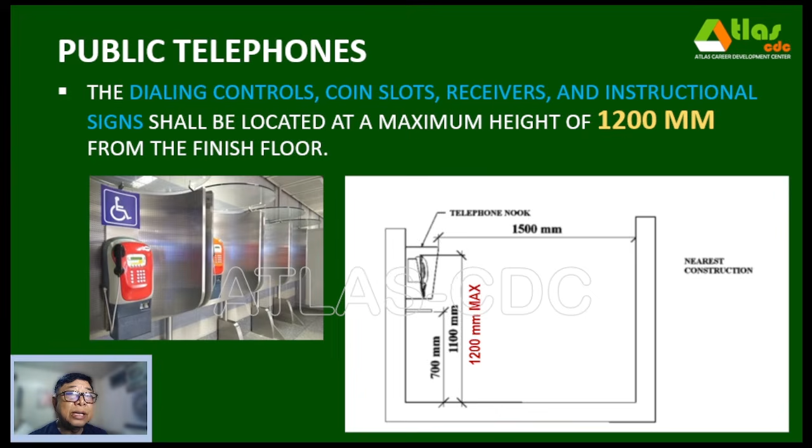Also, provide a clear, unobstructed space of 1.8 meters by 1.8 meters in front of all mounted and freestanding telephones. So, ang clear space mula doon sa telephone apparatus hanggang sa wall, no? Clear space should be 1.8 meters. At saka sa harapan, dapat ay merong ganong space na width, no? 1.8 meters in front of this telephone area.

Now, for establishments that provide public telephones, accessible public phones shall be installed, one for each floor and one for every group of 2 or more phones. So, sa mga required lang to, no, na magpo-provide ng public telephone. So, maglagay ng isa sa bawat floor, no? At kung marami, for every 2 or more phones, one, no? Accessible public telephone facility.

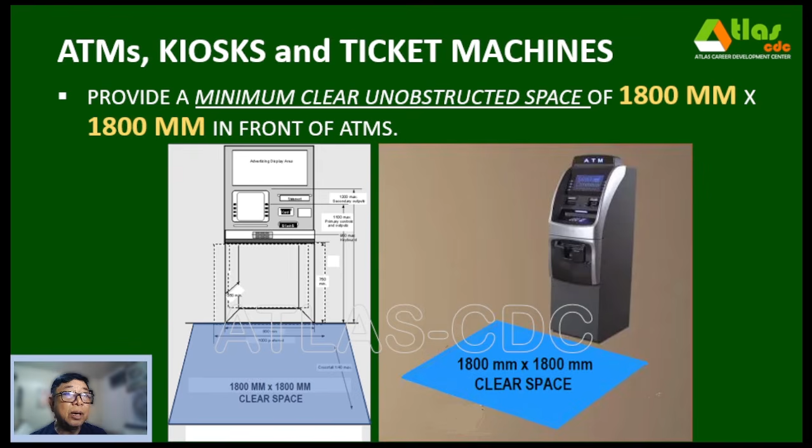And for ATMs, kiosks, and ticket machines, provide a minimum clear unobstructed space of 1.8 meters by 1.8 meters in front of the ATM area. And instructions and all information for use shall be made accessible and independently usable by persons with visual disabilities through braille and tactile surfaces and audio through speakers or earphone jacks.

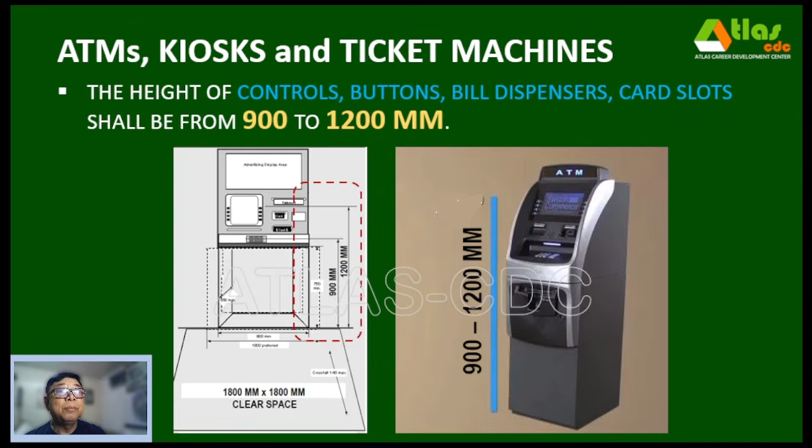The height of controls, buttons, bill dispensers, card slots shall be from 0.9, so this is a minimum, up to a maximum height of 1.2 meters. Now, counters shall be provided in the kiosk, ATMs, and ticket machines at a height of 750 mm. So, ito yon, no? Merong counter to allow wheelchair users to easily approach. To enable easy operation of the machine by wheelchair users, this space under the counter shall have a minimum depth of about 480 mm.

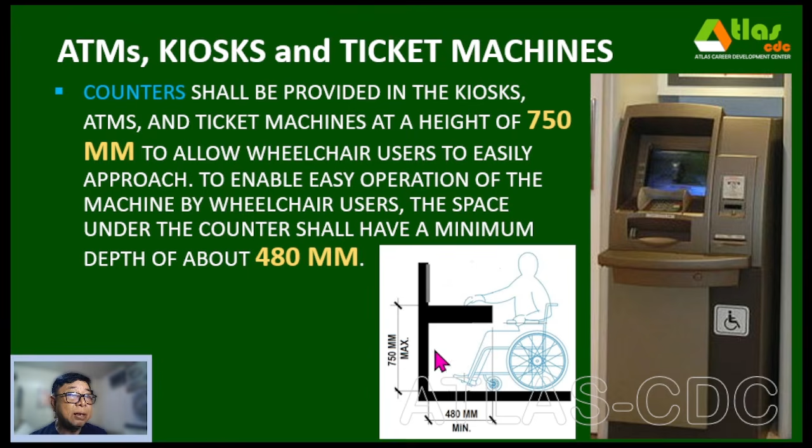Now, there shall be clear signage indicating the location and function of the kiosks, ATMs, and ticket machines, as well as any instructions for their use. The signage shall be easily visible and located at a height of no more than 2.4 meters above the floor.

We now have the requirement for accessible ticket office counters and information desks. So all counters shall apply universal design. 2 level counters, one is the low counter and the higher counter, shall be provided in all customer service and ticketing offices and information desks. It shall be accessible both in a standing and sitting position.

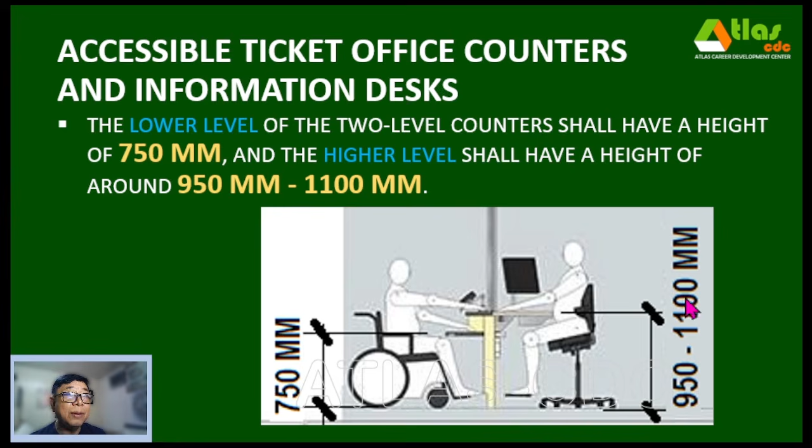The lower level of the two-level counter shall have a height of 0.75, this one, and the higher level shall have a height of around 0.95 or 950 mm up to 1.1 meters. The counters shall have a 700 mm minimum vertical legroom space. So sa ilalim ng counter is 0.7 clear space and shall have a counter depth of 480 mm.

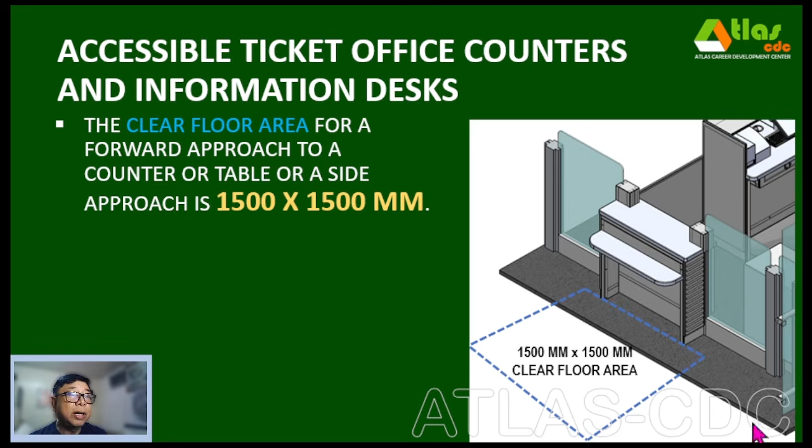The clear floor area for a forward approach to a counter or table or a side approach is 1.5 by 1.5 meters. So ito yung counter, merong clear floor area na 1.5 by 1.5 meters. Now, each counter shall be at least 900 mm wide, this one, to provide ample space for people using wheelchairs or mobility aids.

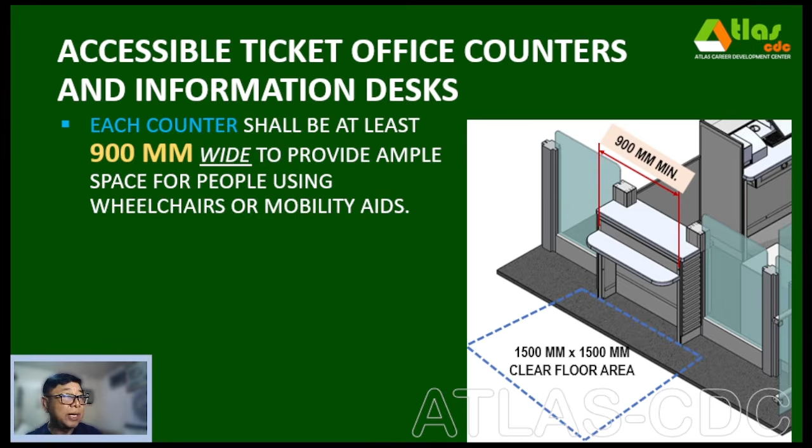We now go to workstations. Accessible workstations shall account for a minimum of 1% of the total number of workstations available in an office, workspace, or similar environments. And the access aisle shall have a minimum width of 900 mm. So yung mga dadaanan na space between workstations ay may minimum width na 900 mm.

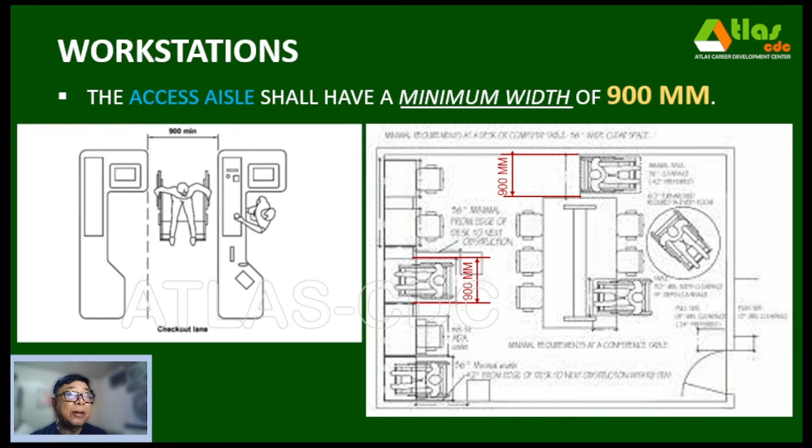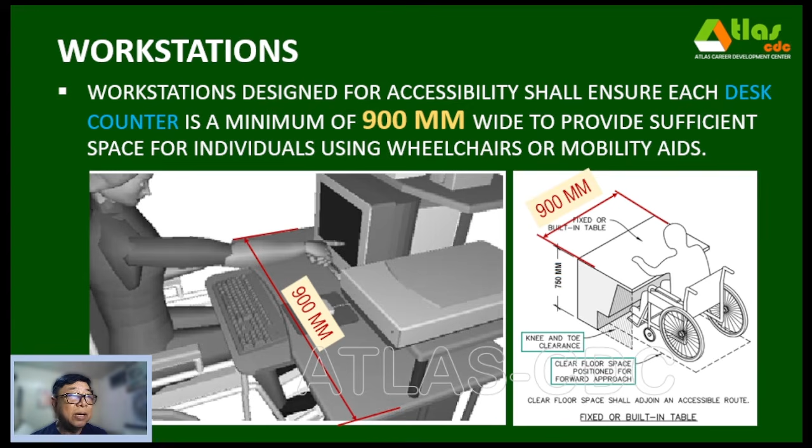The workstations designed for accessibility shall ensure each desk counter is 900 mm wide to provide sufficient space for individuals using wheelchairs or mobility aids. And this workstation shall include desk counters with a minimum vertical legroom space of 700 mm and a counter depth of 480 mm. This one.

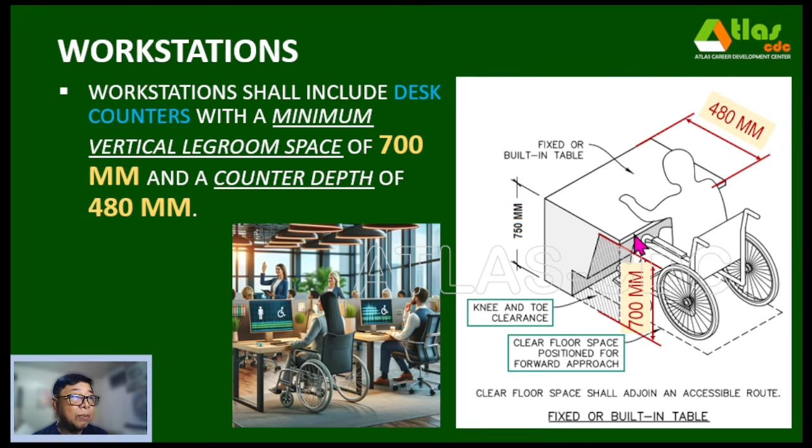For restaurants, eateries, and other dining establishments, a circulation path of at least 1.5 meters wide shall be provided in front of the stalls. Ito yung stalls. Ito yung other spaces, no? Either table or railing. 1.5 meters is the minimum clear distance. No?

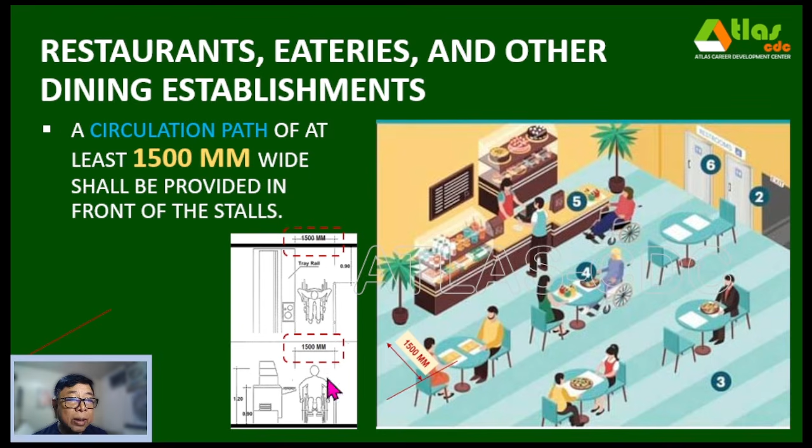An accessible route with a minimum clear width of 900 mm shall be provided from the circulation path to the tables intended for persons with disabilities. So ito yung pinaka-aisle width, no? 0.9. Lahat ng dadaanan, clear space mula doon sa mga dining chairs.

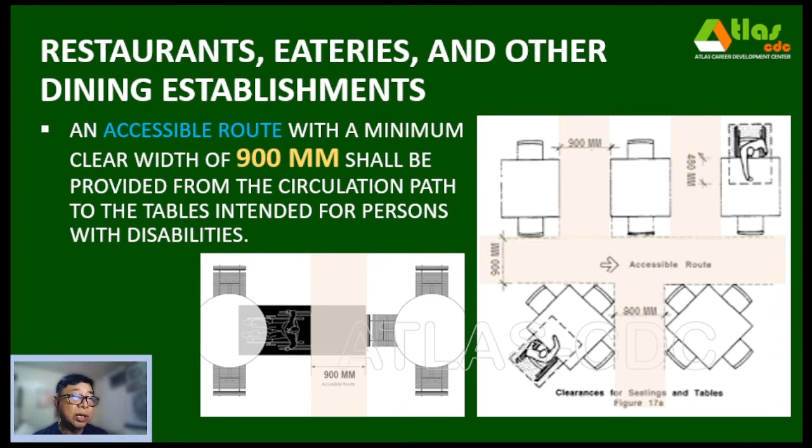Now, where fixed seating is provided in eating outlets and establishments, 10% of the total number of dining tables shall be accessible to persons with disabilities. Any fraction thereof is equivalent to 1 accessible dining table. So halimbawa, mayroong 22 restaurant tables times 10%, yung magiging 2.2 accessible dining tables. Pero this is to be rounded off to 3 dining tables.

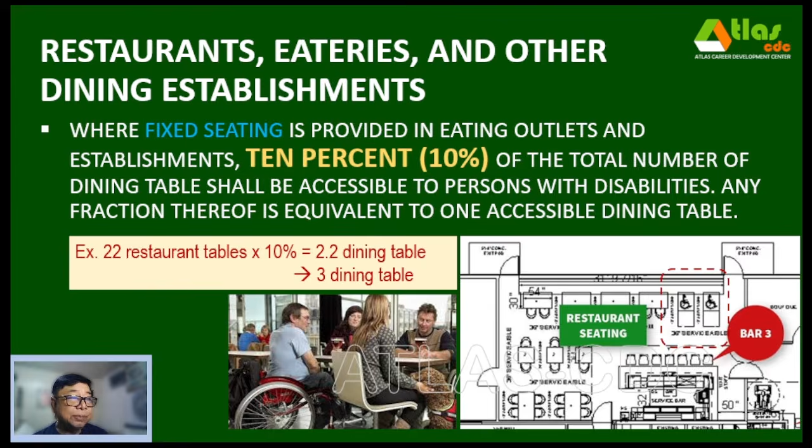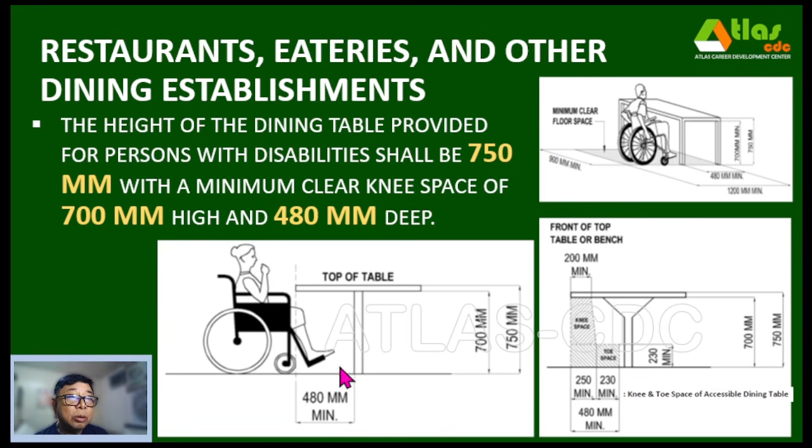Now, the height of the dining table provided for persons with disabilities shall be 750 mm. That is the maximum height. Again, with a minimum clear knee space of 700 mm and a depth of 480 mm. So, ito yung knee space na depth, no? 480 mm.

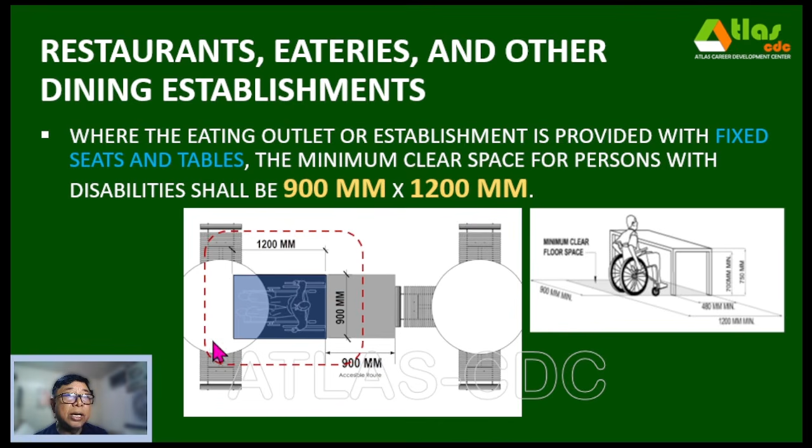So, where the eating outlet or establishment is provided with fixed seats and tables, so kung fixed seating yan, tsaka table, ang minimum clear space for persons with disabilities shall be 900 mm by 1.2 meters. So, ito yung space, no, for the persons with disabilities. Now, the sizes of fixed tables shall accommodate 2 wheelchair users. So, kung merong 0.9 by 1.2 na dalawa, then this should accommodate ng dalawang wheelchair users yung table.

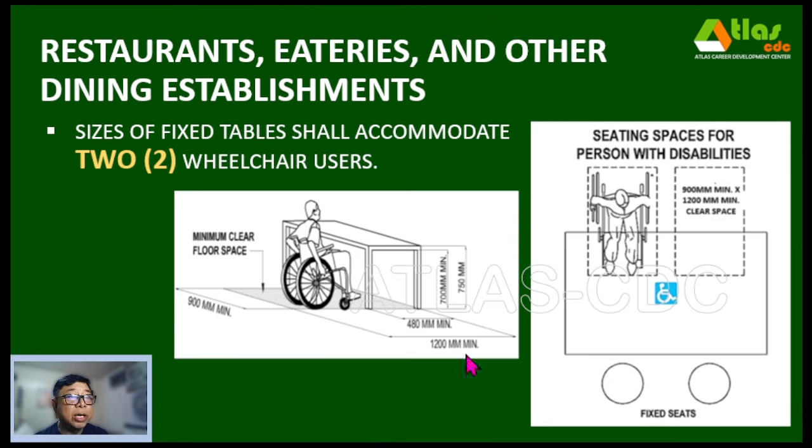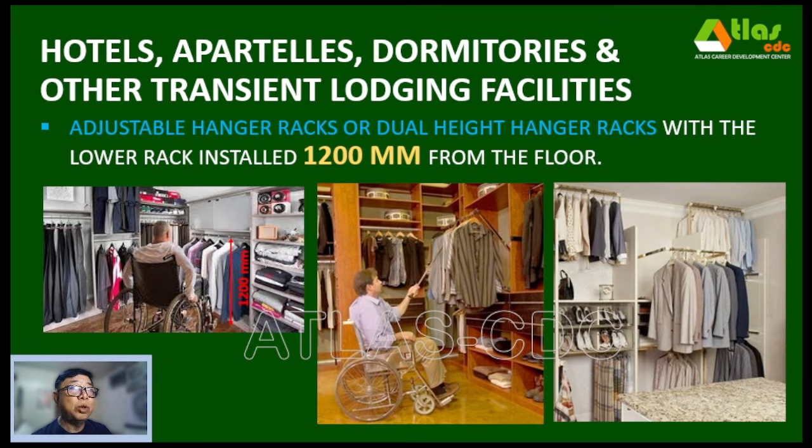Now, for hotels, apartelles, dormitories, and other transient lodging facilities, 2% of the total number of guest rooms shall be accessible guest rooms. The bed shall have a maximum height of 500 mm. Adjustable hanger racks or dual height hanger racks with the lower rack installed at 1.2 meters from the floor.

And this is a suggested layout of an accessible one-bed guest room, providing a hallway width of 1.2 meters minimum. And on one side of the bed is a 1.5 by 1.5 meters wheelchair space. And the other side of the bed will have a circulation space of 0.7 meters or 700 mm minimum width.

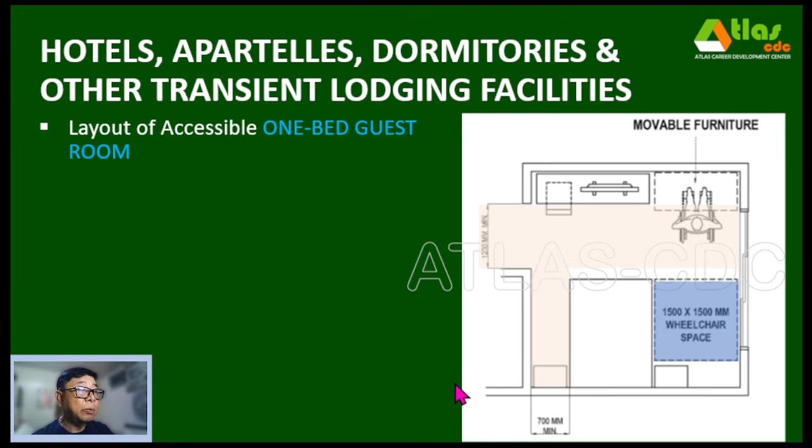Now, this is the suggested layout for an accessible 2-bed guest room, wherein the door opening is minimum of 0.9 width, and after the door opening is a clear space of 1.5 by 1.25 minimum. The circulation space minimum width is 1.2 meters. And if you have 2 beds, the clear space between the 2 beds is 0.7. And one side of the bed shall have the 1.5 by 1.5 meters clearance, wheelchair space.

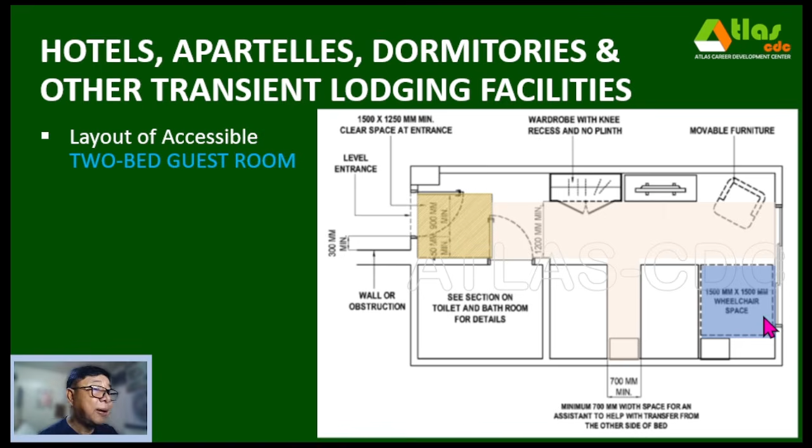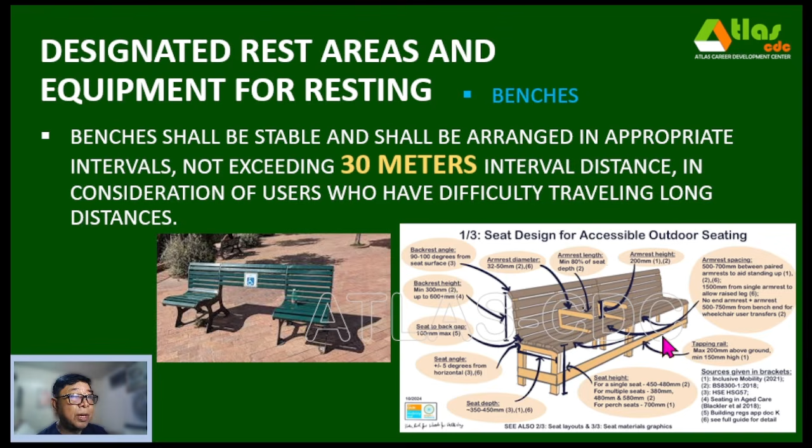This is the requirement for designated rest areas and equipment for resting. For benches, this shall be stable and shall be arranged in appropriate intervals, not exceeding 30 meters interval distance. So, halimbawa, merong mga walkway na lalagyan ng mga benches, pinaka-maximum distance is 30 meters na merong bench for PWDs. At pwedeng ang design ay maglagay ng space for the wheelchair or merong ganitong armrest provision para sa mga non-wheelchair users. Now, for outdoor rest areas, appropriate shading shall be provided to ensure comfort and protection from the elements. Kung nasaan merong bench, meron shade na ipoprovide.

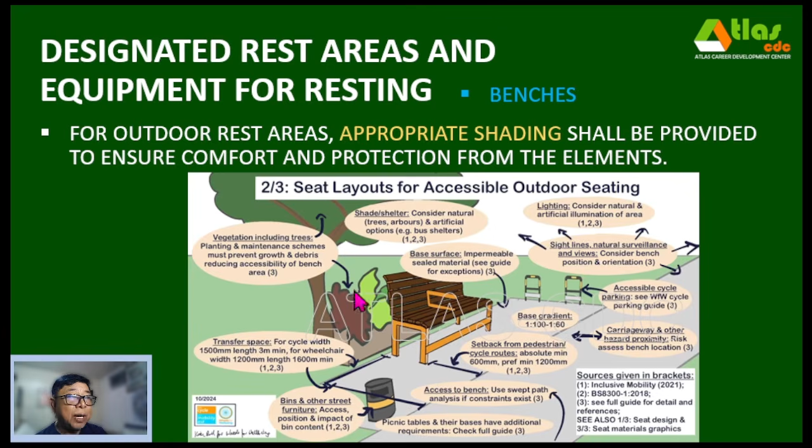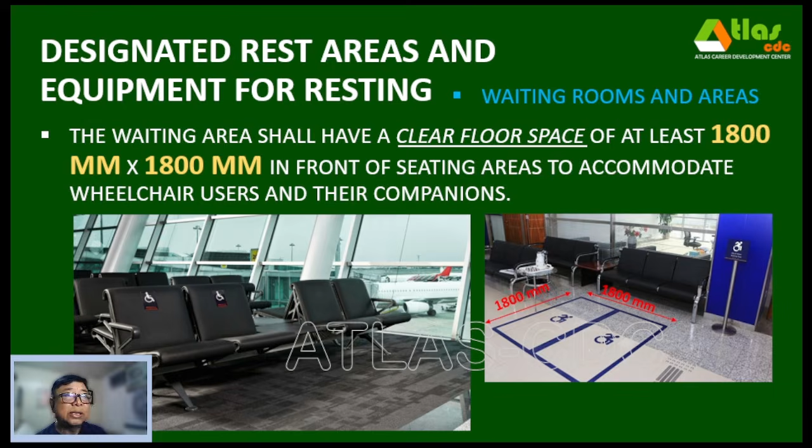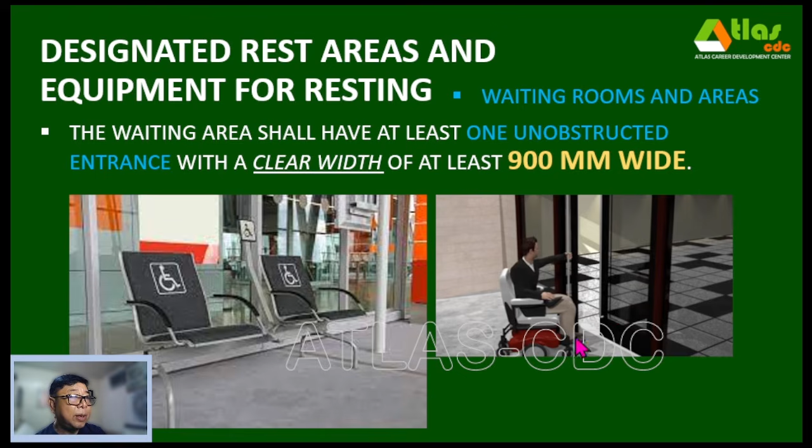And the waiting rooms and areas. The waiting area shall have a clear floor space of at least 1.8 by 1.8 meters in front of seating areas to accommodate wheelchair users and their companions. So, ito yung wheelchair area, 1.8 by 1.8 meters. The waiting area shall have at least one unobstructed entrance with a clear width of at least 900 mm. So, yung mga door, minimum clearance is 900 mm. And at least 5% of the seating shall be designated as priority seating for individuals with disabilities.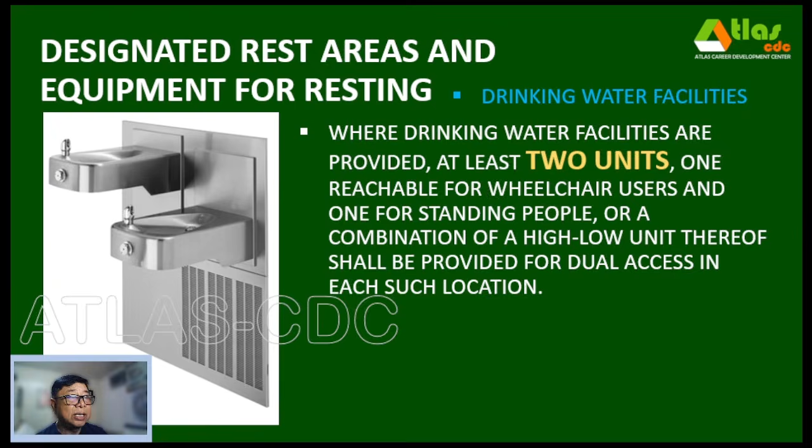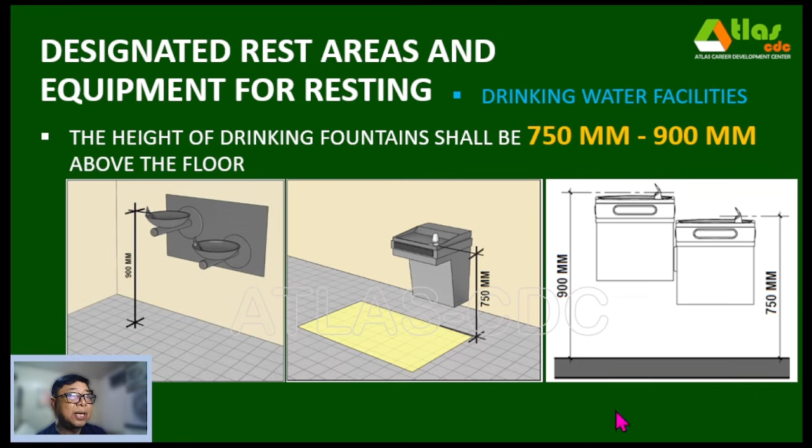Now, for drinking water facilities, where drinking water facilities are provided, at least 2 units, one reachable for wheelchair users, and one for standing people, or a combination high-low unit, for example, this one's a combination, shall be provided for dual access in each such location. The height of drinking fountain shall be 750 mm up to 900 mm above the floor. So, yung mas mababa, 0.75 or 750 mm, at yung mas mataas is 900 mm.

Now, the spout shall be able to extend at least 50 mm from the front edge of the fountain. So, ito ang spout. Now, if a bottle filling station is included, the spout shall extend at least 100 mm from the front edge of the fountain. So, ito yung magiging distance kapag may bottle filling station. Or you can provide a separate provision for bottle filling station.

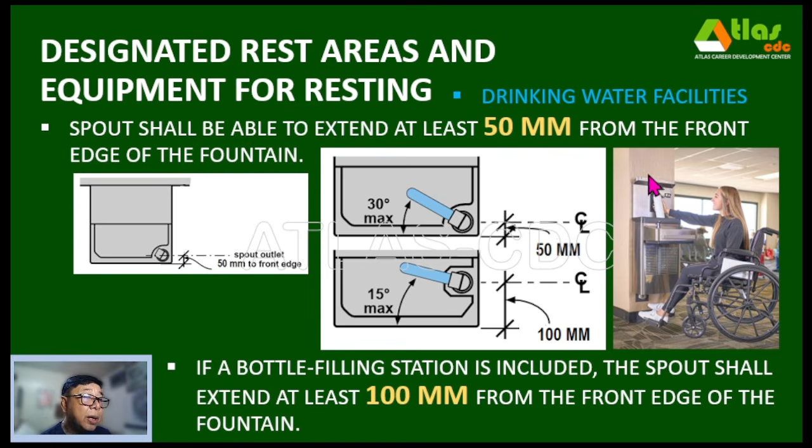Now, the drinking fountain shall have a clear floor space of at least 1.8 by 1.8 meters in front of and alongside the unit to allow for a person using a wheelchair to access the fountain. So, 1.8 by 1.8 clear space sa harapan ng drinking fountain.

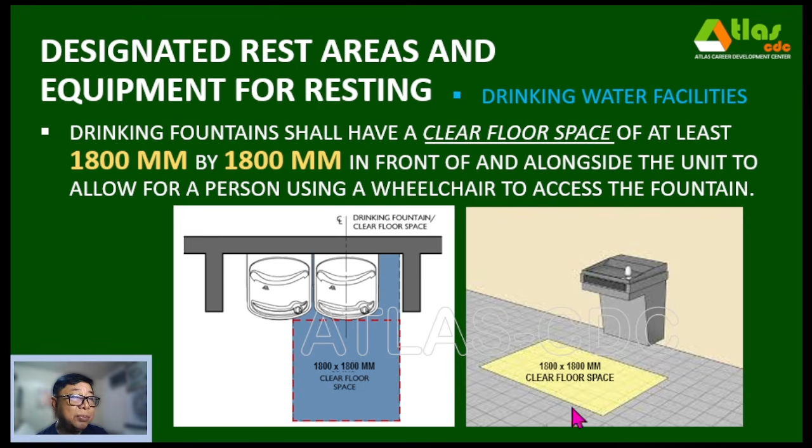The clear knee space of 750 mm wide, 200 mm deep, and 650 mm high shall be provided. So, ito yung knee space, no? At a height of 650 and a depth of 200 mm, ang width niya is 750 mm. Yung toe space naman niya is also 200 mm deep, 200 mm high, at ang width niya is also 750 mm.

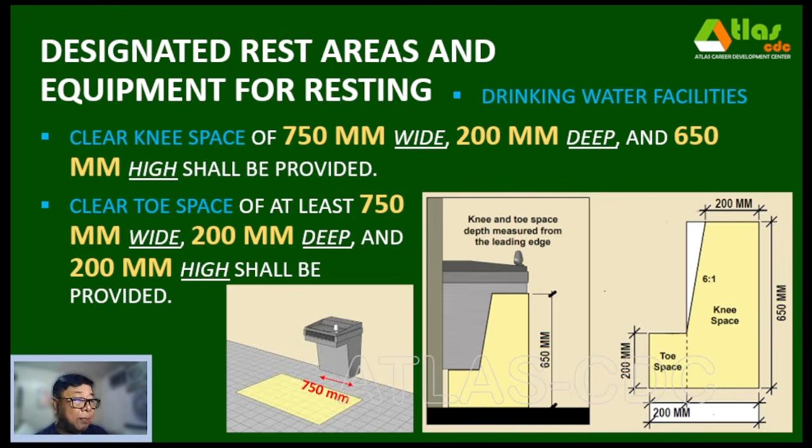Now, for breastfeeding room, there shall be a designated room for nursing and diaper changing purposes that is accessible to all.

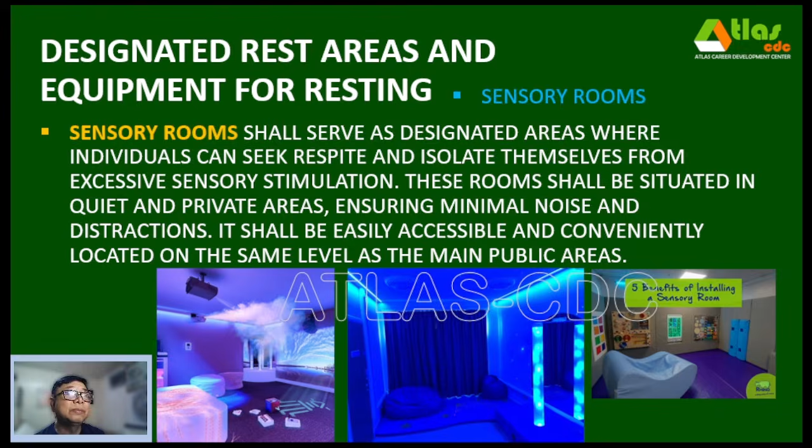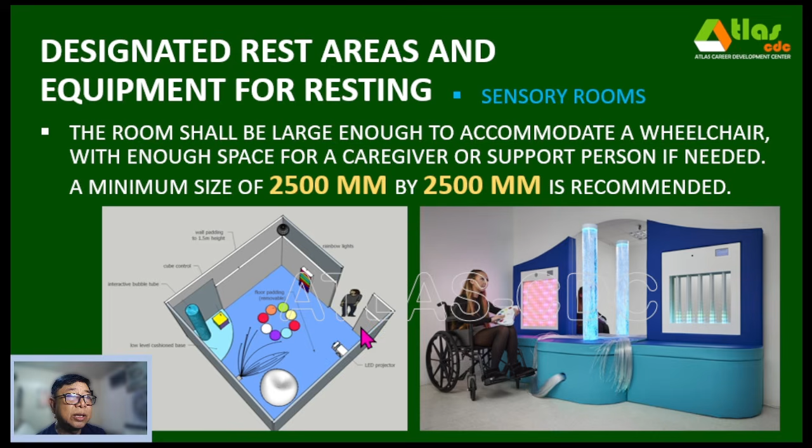Also, sensory rooms. Sensory rooms shall serve as designated areas where individuals can seek respite and isolate themselves from excessive sensory stimulation. This room shall be situated in quiet and private areas, ensuring minimal noise and distractions. It shall be easily accessible and conveniently located on the same level as the main public areas. The sensory room shall be large enough to accommodate a wheelchair with enough space for a caregiver or support person if needed. A minimum size of 2.5 meters by 2.5 meters is recommended.

Now, the doorway shall have a clear width of at least 900 mm wide and shall be easy to open with no threshold or step. The door shall be designed to allow for access from both the inside and outside in case of emergency.

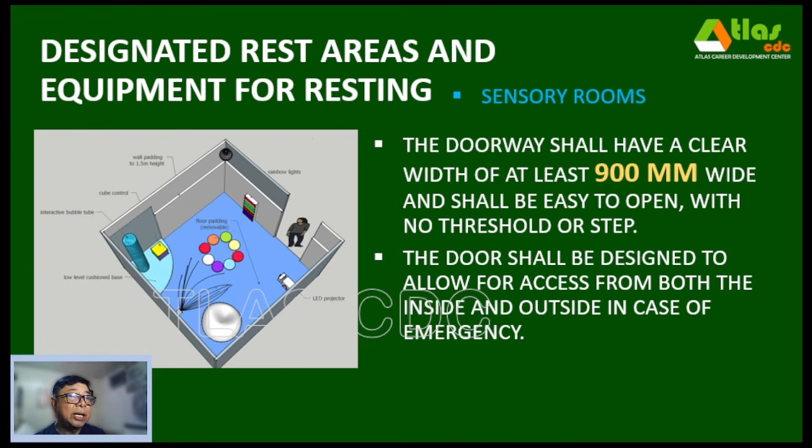For dressing rooms and cubicles, accessible dressing rooms shall have a minimum clear turnaround space of 1.8 by 1.8 meters and a minimum clear door opening of 900 mm, opening outwards. Dressing area shall have a coat hook installed on a side wall not more than 1.2 meters from the floor, so yung height, no? And projecting not more than 40 mm from the wall.

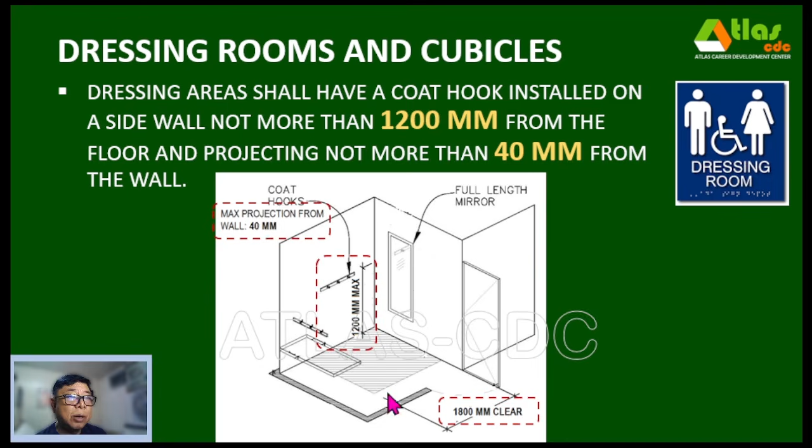The accessible dressing room shall have handrails installed 800 mm from the finished floor to top of handrail. The accessible dressing room shall be identified by the international symbol of accessibility mounted at 1.8 meters on center to finished floor at the exterior face of the door.

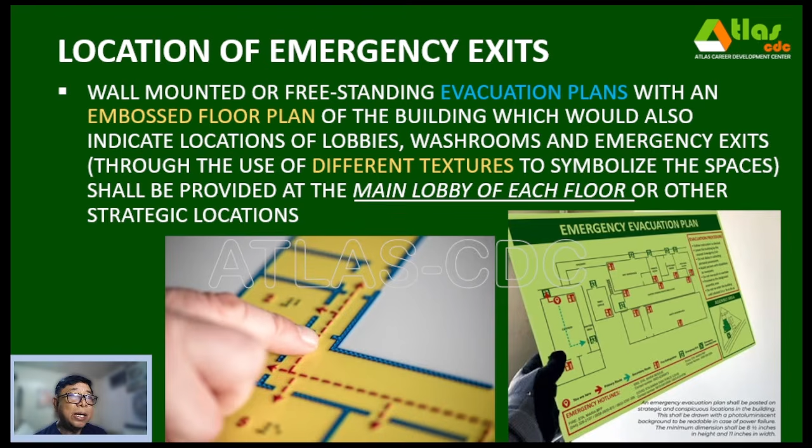For the location of emergency exits, wall-mounted or freestanding evacuation plans with an embossed floor plan of the building, which would also indicate locations of lobbies, washrooms, and emergency exits through the use of different textures to symbolize the spaces, shall be provided at the main lobby of each floor or other strategic locations. The markings on this evacuation plan shall be readable by both the blind and the sighted. So, merong braille at merong mga normal lettering.

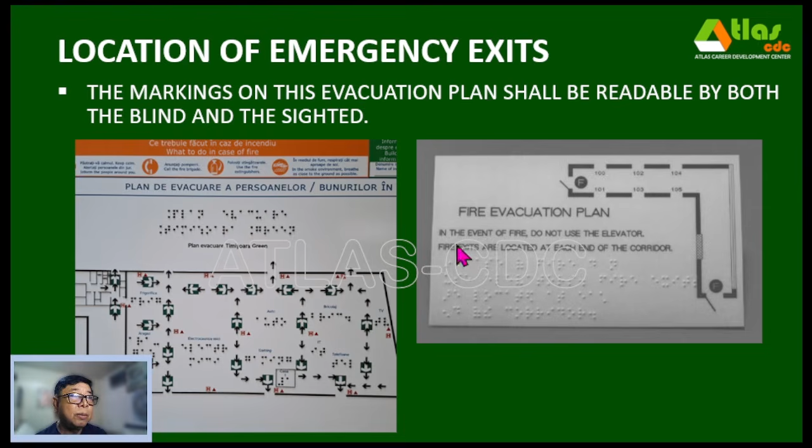For the requirements on areas of refuge, the minimum dimensions of a refuge area shall be 900 mm, 0.9 by 1.2 meters. Ito ay nilalagay sa mga fire exits.

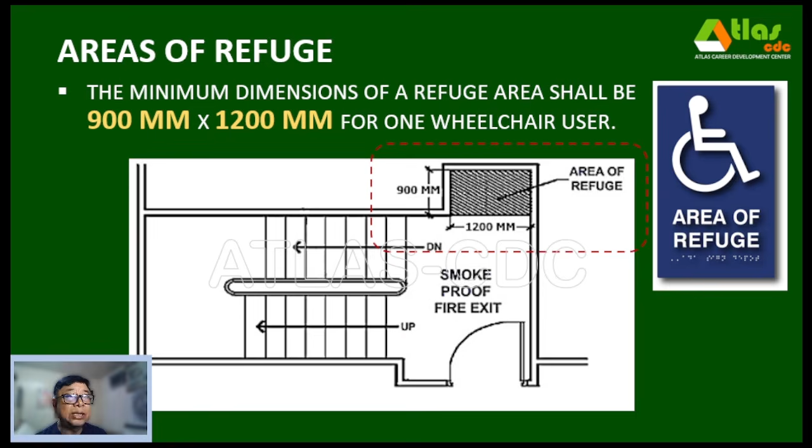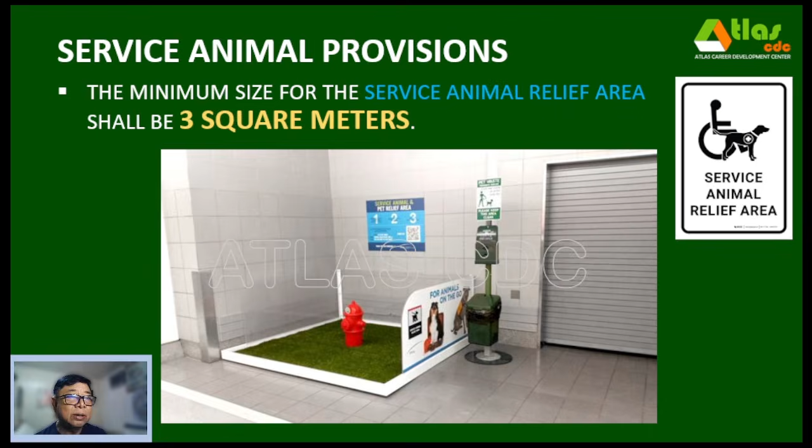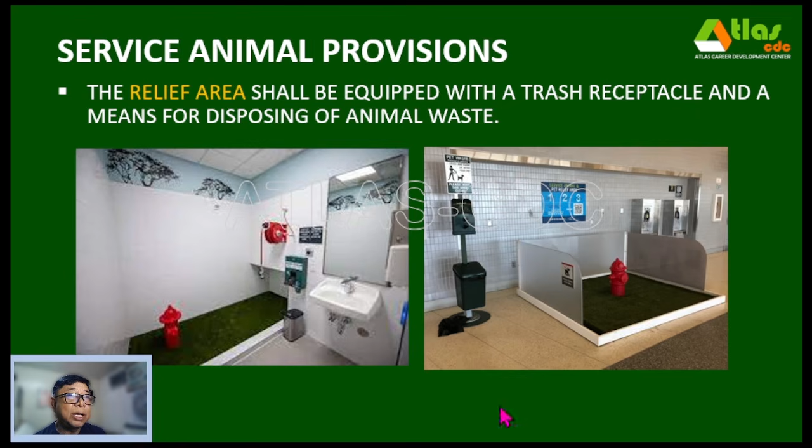Now, we have also requirements for service animal provisions. The minimum size for the service animal relief area shall be 3 square meters. The relief area shall have a sign that displays the international symbol of access for people with disabilities and information on the designated use of the area. The relief area shall be equipped with a trash receptacle and a means for disposing of animal waste.

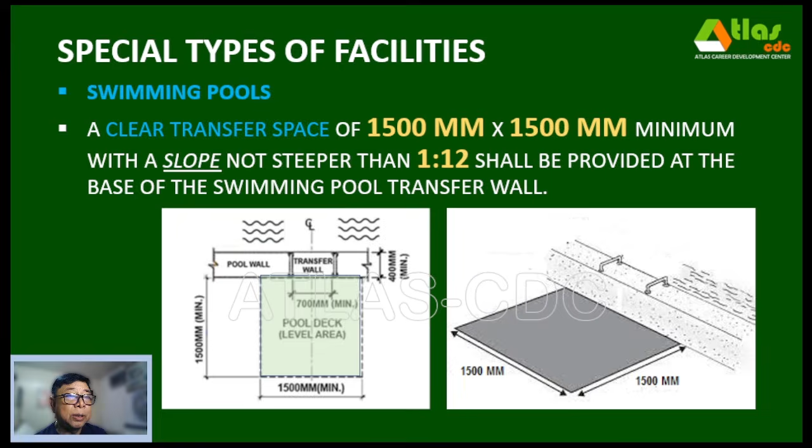Now we go to the special types of facilities. For swimming pools, a clear transfer space of 1.5 by 1.5 minimum with a slope not steeper than 1:12 shall be provided at the base of the swimming pool transfer area or transfer wall. The height of this transfer wall shall be 450 mm measured from the top of the transfer wall to the finished dropped deck floor.

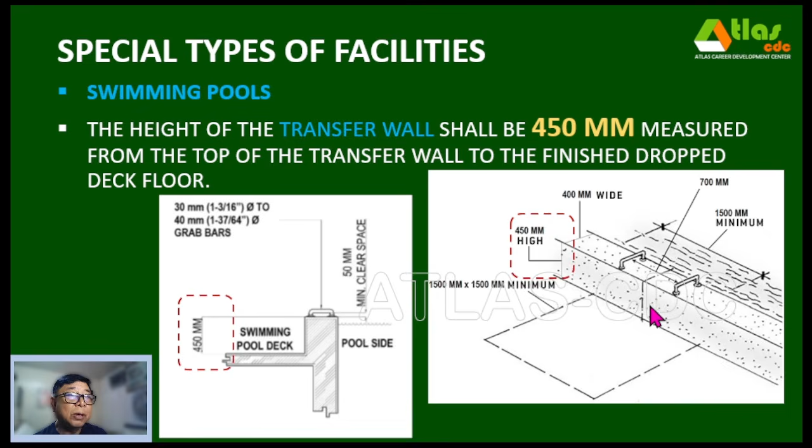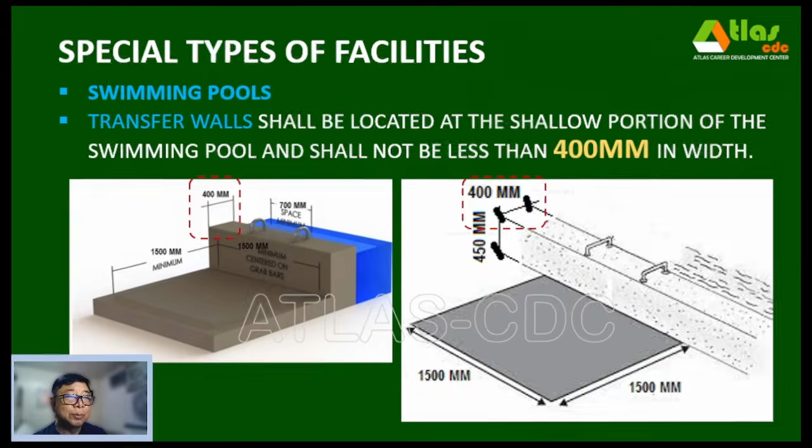Also, the transfer wall shall be located at the shallow portion of the swimming pool and shall not be less than 400 mm in width. 2 grab bars shall be provided and spaced at 700 mm clear space in between. So, ito yung grab bars.

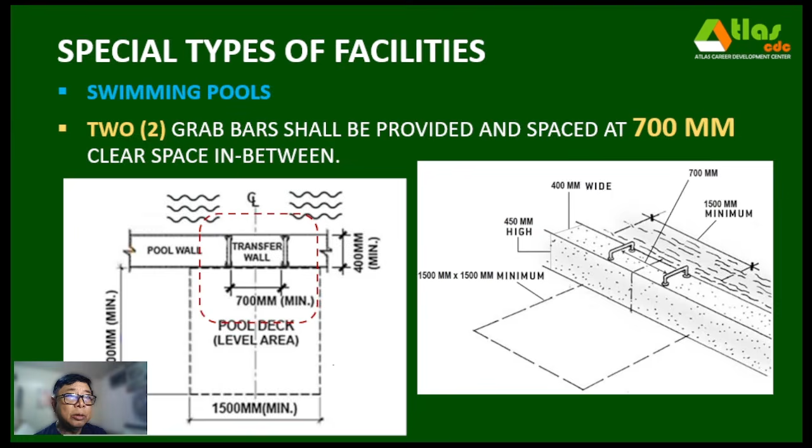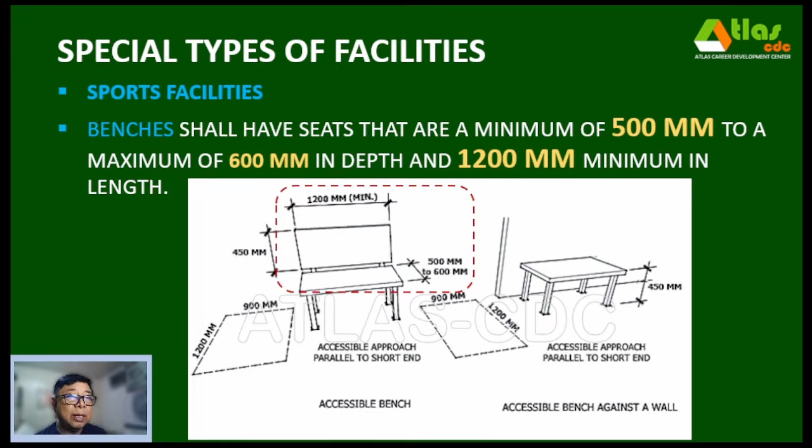Now, we go to requirements for sports facilities. Benches shall have seats that are a minimum of 500 mm to a maximum of 600 mm in depth and 1.2 meters minimum in length. The benches shall have a seat height of 450 mm above the finished floor.

If the bench is not located next to a wall, the bench shall have a back support that is 1.2 m minimum in length and extends from a point 50 mm above the seat up to this backrest, 50 mm distance, and to a point of 450 mm minimum above the bench. So from the bench to the top is a total of 500 mm.

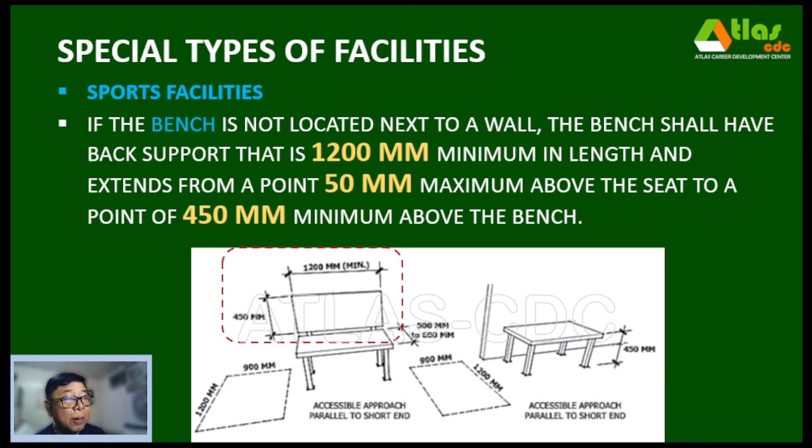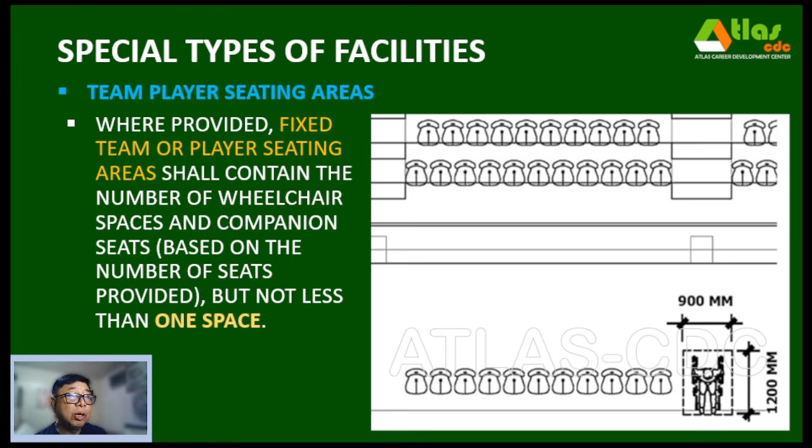For team player seating areas, where provided, fixed team or player seating areas shall contain the number of wheelchair spaces and companion seats based on the number of seats provided, but not less than 1 space.

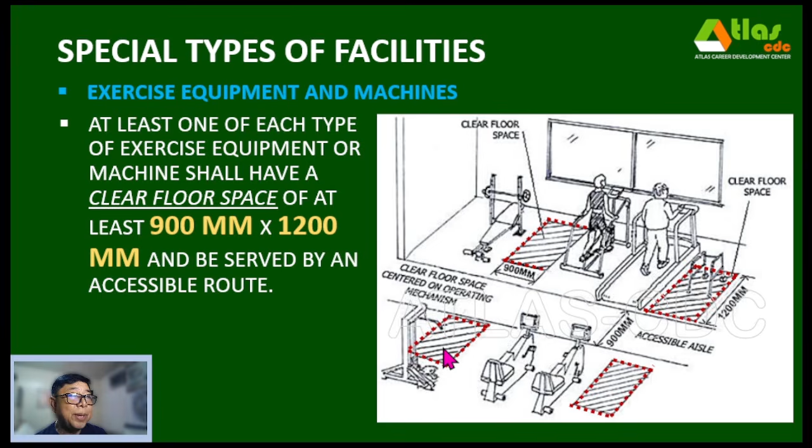For exercise equipment and machines, at least 1 of each type of exercise equipment shall have a clear floor space of at least 900 mm by 1.2 meters. Each equipment must have this clear space. And if the clear space is enclosed on three sides by walls or the equipment itself, the clear space shall still be at least 900 mm by 1.2 meters.

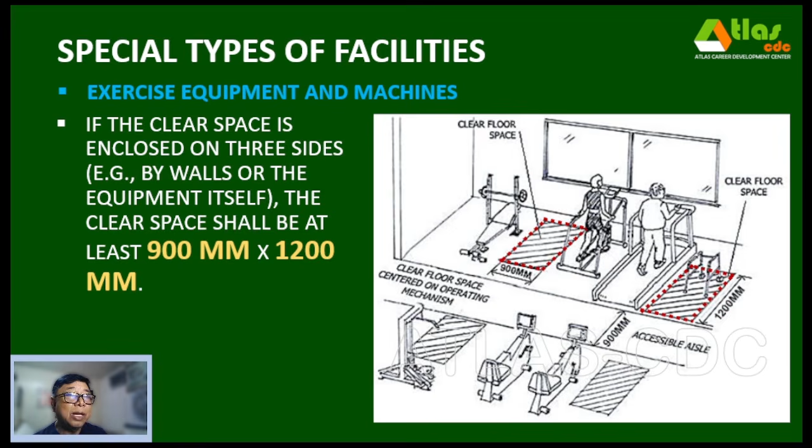The clear floor space shall be positioned to allow a person to transfer from a wheelchair or to use the equipment while seated in a wheelchair. For example, to make a shoulder press accessible, the clear floor space shall be next to the seat. But the clear floor space for a bench press designed for use by a person using a wheelchair shall be centered on the operating mechanism.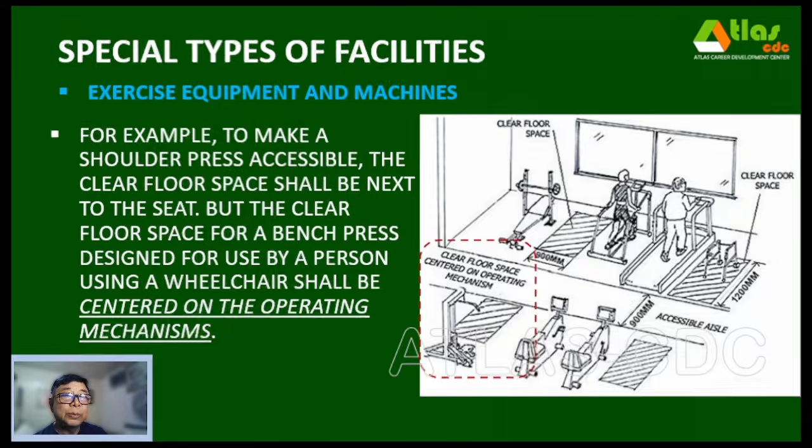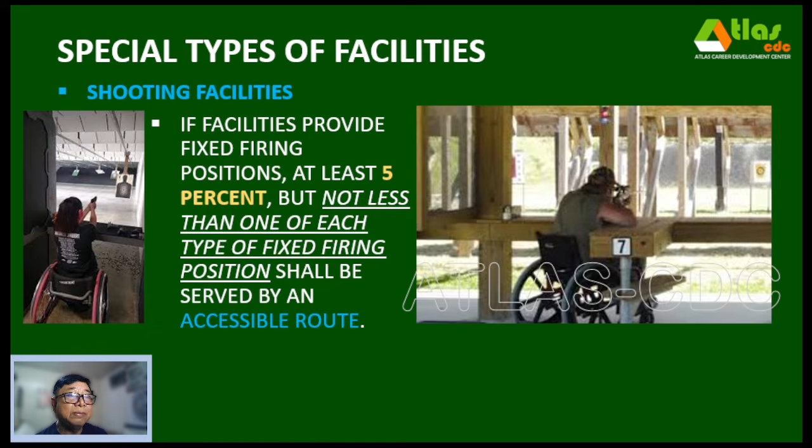Now we go to the requirements for shooting facilities. If facilities provide fixed firing positions, at least 5%, but not less than one of each type of fixed firing position, shall be served by an accessible route.

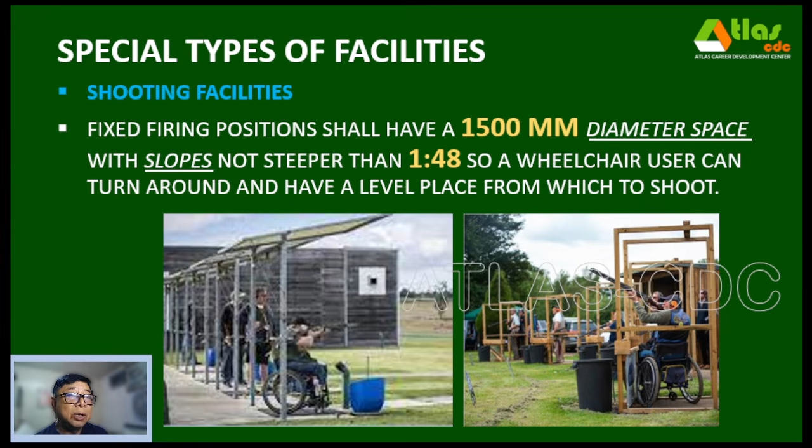The fixed firing position shall have a 1.5 meter diameter space, with slopes not steeper than 1:48, so a wheelchair user can turn around and have a level place from which to shoot.

Now for bowling areas, at least 5%, but not less than 1, of the total number of bowling lanes shall be accessible.

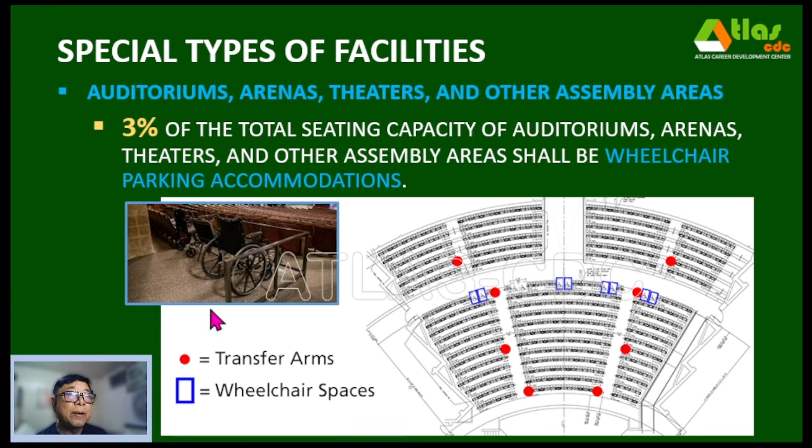For auditoriums, arenas, theaters, and other assembly areas, 3% of the total seating capacity shall be wheelchair parking accommodations, located near the exit so a person can exit quickly. This is the area for wheelchair spaces.

Each wheelchair viewing position shall be clear, firm, and level. The minimum footprint for a single wheelchair seating space, front or rear entry, shall be 900 mm by 1.2 meters.

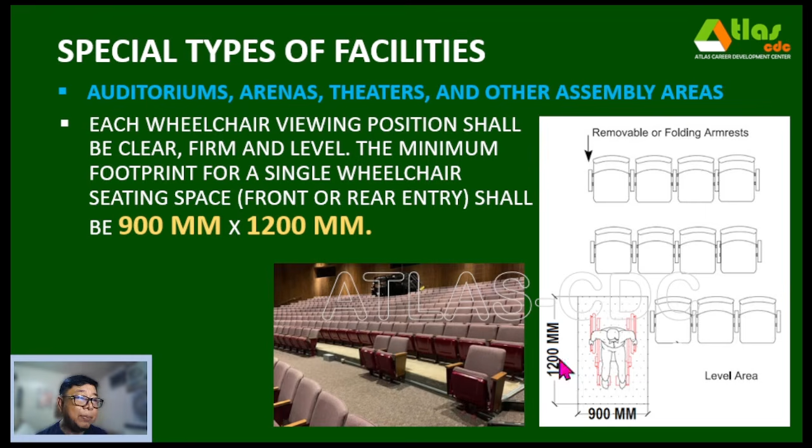The accessible seating shall be provided with handrails 750 mm high at the front and at the sides.

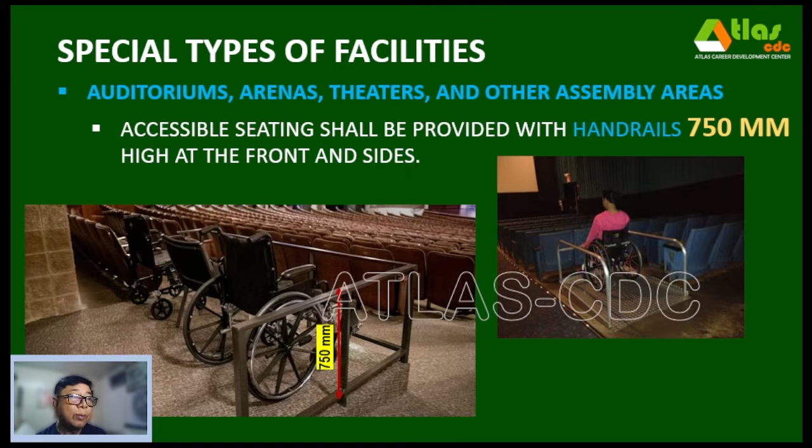Now, hearing enhancement systems shall be provided in A. Function rooms, halls, and auditoriums used for meetings, lectures, performances, or films, and B. At least one of the public information service counters for cinemas, theaters, concert halls, stadiums, museums, theme parks, purpose-built family amusement centers, sport complexes, public swimming pools, hospitals, clinics, transport stations, interchanges, and passenger terminals.

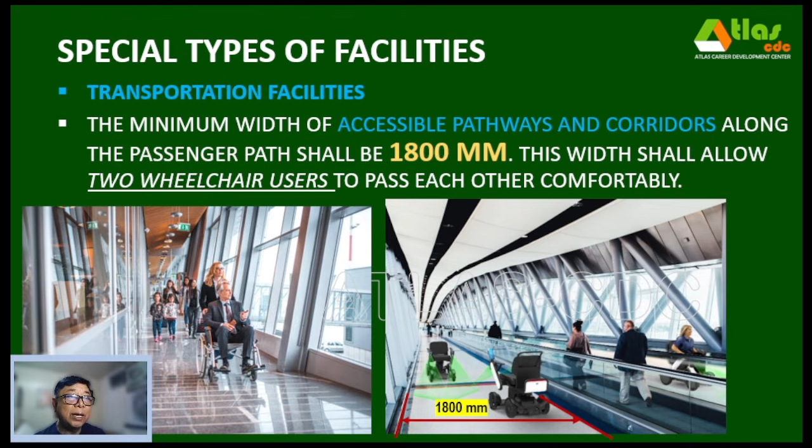Now for transportation facilities, the minimum width of accessible pathways and corridors along the passenger path shall be 1.8 meters. This width shall allow two wheelchair users to pass each other comfortably.

In cases where support pillars, columns, or other barriers are present, a minimum clearance of at least 900 mm shall be provided to ensure unobstructed passage.

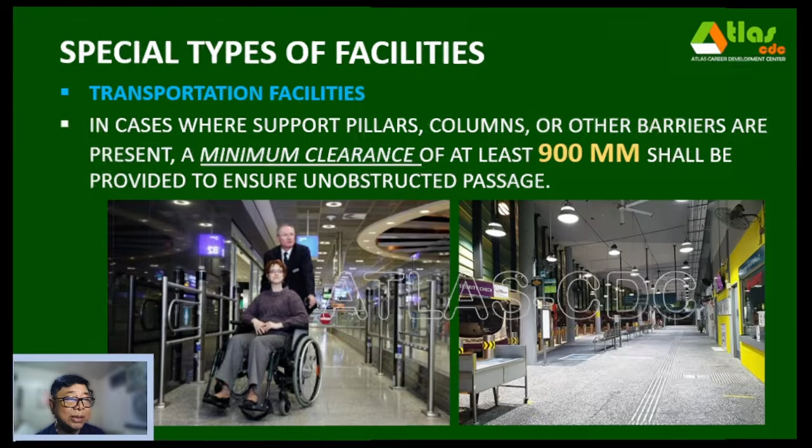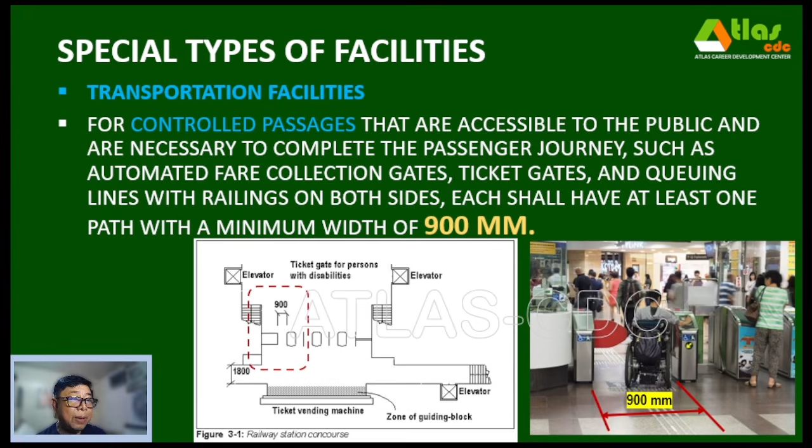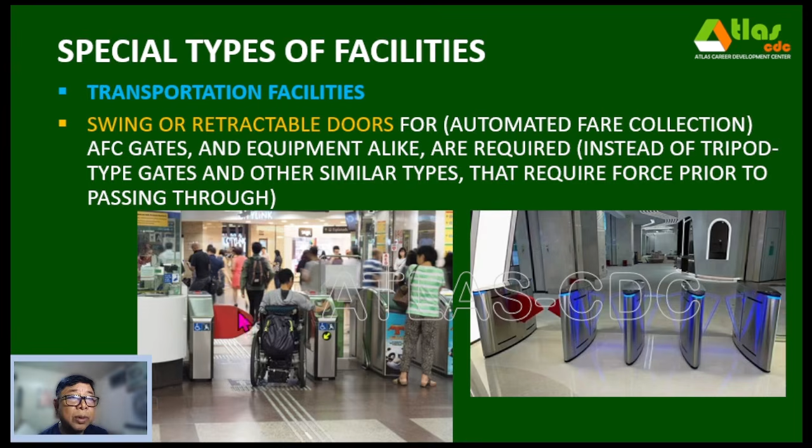Swing or retractable doors for automated fare collection (AFC) gates and equipment alike are required instead of tripod-type gates and other similar types, like the rotating turnstile. So retractable or swing doors should be installed instead.

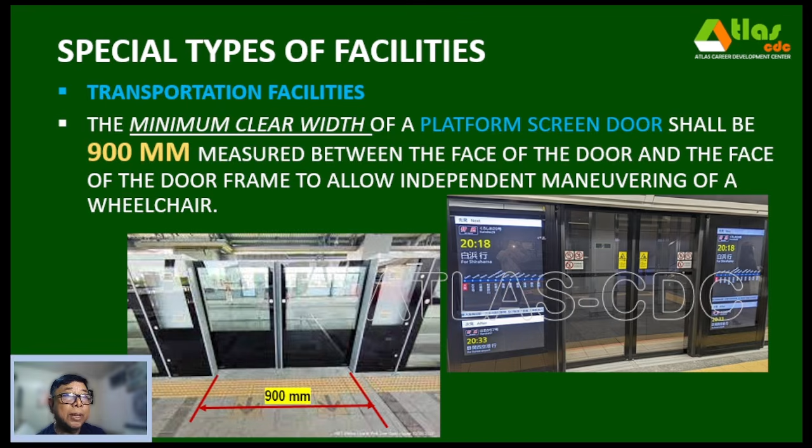For warning, tactile blocks with a depth of 600 mm shall be installed, at least 300 mm before every PSD opening. PSD means platform screen door opening.

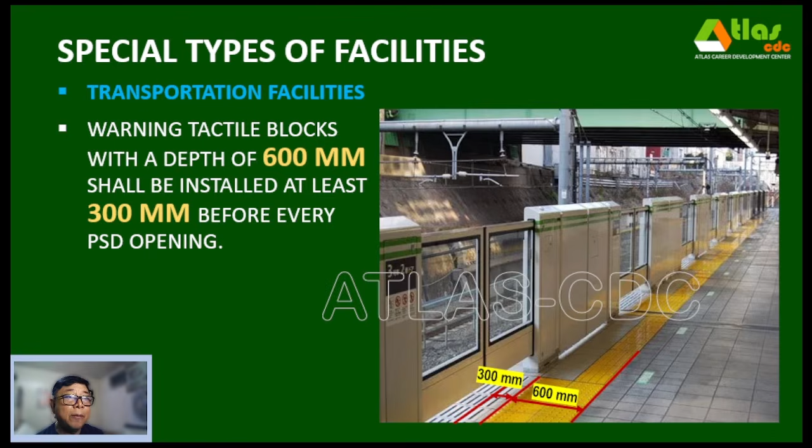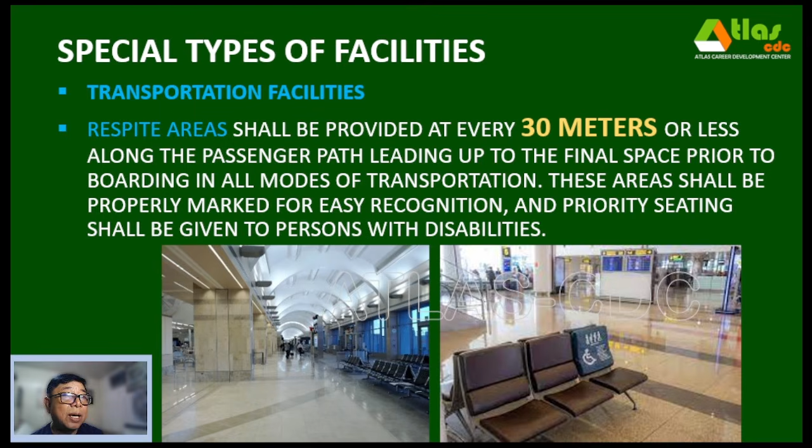So a respite area shall be provided at every 30 meters or less along the passenger path leading up to the final space prior to boarding, in all modes of transportation. This rest area shall be properly marked for easy recognition, and priority seating shall be given to persons with disabilities. And that's the end of our discussion for BP344, the amended IRR.